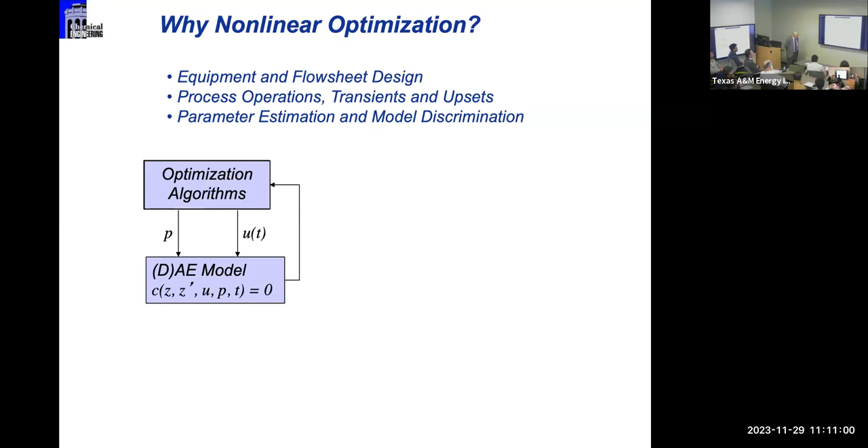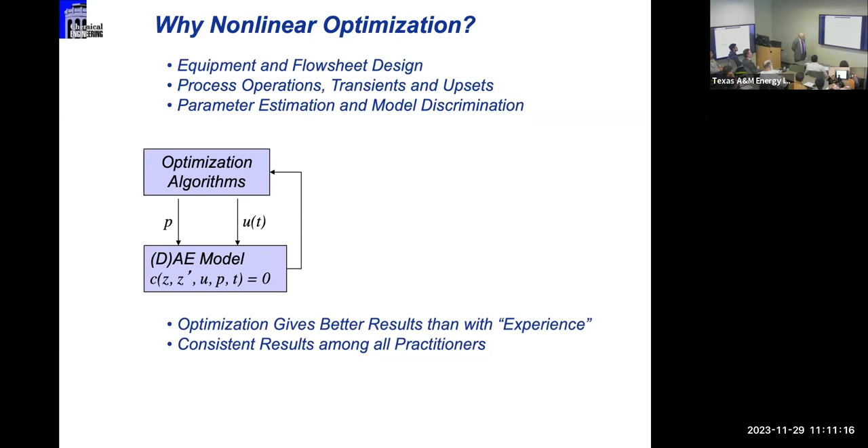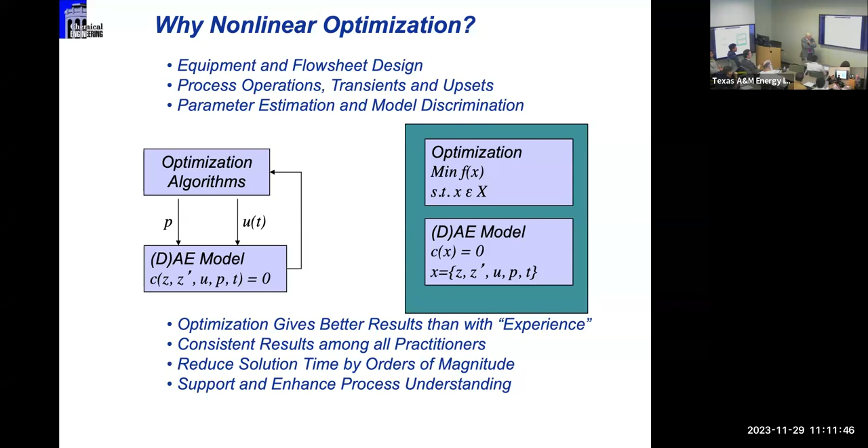We'll get into some caveats here, but I think that's essentially one of the things I wanted to focus on. Over the last 40 years, and Stratos has witnessed and participated in some of these things, you start off with this idea: don't search, solve for the optimality conditions directly. Now, these are local optimality conditions, not global ones.

Everyone wants the global solution, but you have to realize that if you want to do something quickly that scales to large-scale problems, you're probably willing to look at a local solution. And if you're really worried about whether you've overlooked anything, you can get many locals, you can solve for many local solutions. In fact, local methods are actually incorporated in many of the global optimization codes to accelerate them.

So what you do is say, okay, I want to solve those optimality conditions directly, using Newton-based methods to do that. Here are 4 generations of things that I've had the pleasure of working on. SQP is something that was developed in the late 70s, actually developed in the early 60s, and then had an interesting evolution to make it a classical, efficient method in the 70s.

In the 80s, it became part of standard flowsheet optimization techniques. It's still there. In the 90s, you wanted to expand this to do things like real-time optimization in refineries, so there was a variant of SQP that solves much larger problems, up to 10^5 to 10^6 variables, but only about 100 or so degrees of freedom. In this century, there was a breakthrough with interior point methods that breaks the complexity of many constraints with interior point functions, and also allows you to have many degrees of freedom, which allows you to do dynamic optimization.

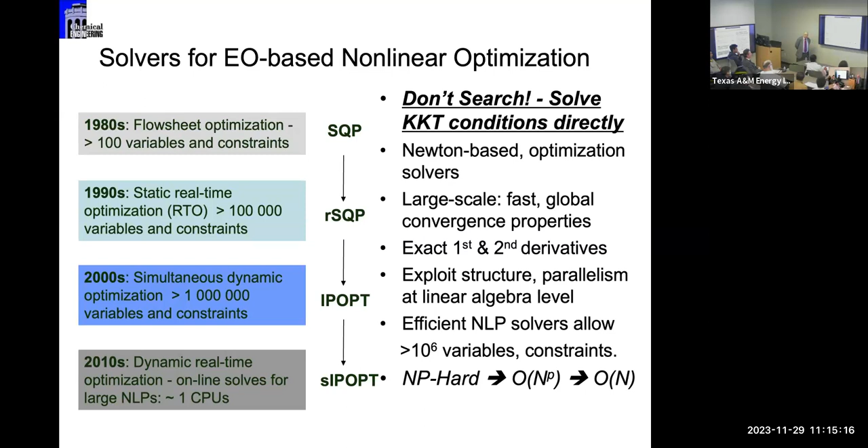So what do we do about this? Well, first of all, there are platforms that work well with these solvers. This one is called Pyomo - there are many others. It's a Python-based platform, Python Optimization Modeling Objects.

You have ways of formulating the type of problem that you have, ways of doing extensions to that problem, and ways of putting those objects together. Then you have a library of different solvers that you can pick and choose depending on the problem type. One of those is IPOPT, which is over there.

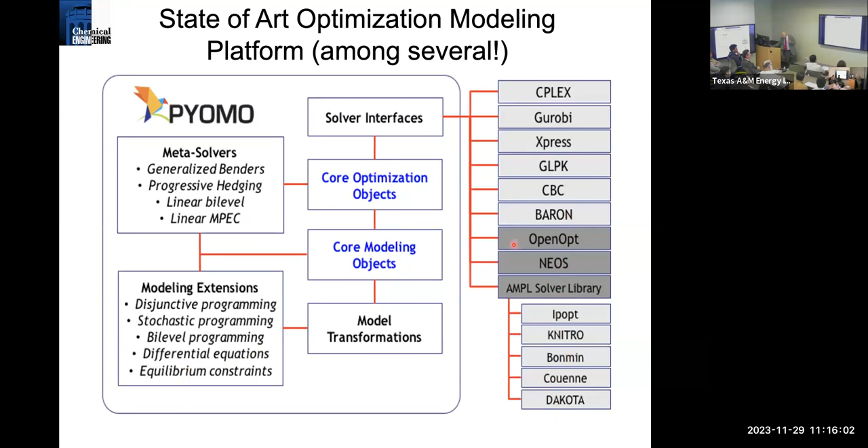Now what we're going to do is take that and ask, what are the challenges for computer-aided process engineering? In particular for energy systems, we're all very interested in decarbonization. We have to deal with processes with new feedstocks, energy sources, more efficient and sustainable and safe processes. Modeling is important, but also finding the best solution for that model is important for different objectives. And it's not one answer - it's a tool for you to explore the space with different and flexible objectives for the optimization problem.

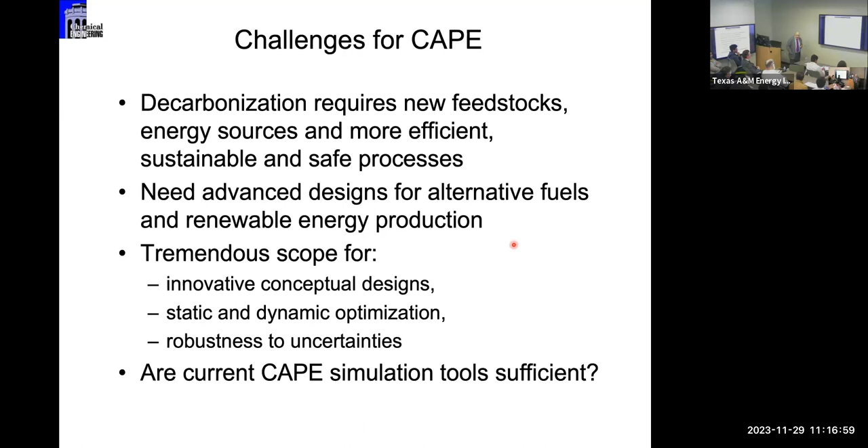So for example, finding advanced designs for alternate fuels - there's a tremendous scope for innovation on conceptual designs, static and dynamic optimization, robustness to uncertainties. Let's see if the tools we have right now are sufficient for that or can be improved.

I wanted to start with something that is maybe a challenge, but something that a lot of work has already been done on. I know Stratos and several people here have been working on advanced control systems, model predictive control. One of the questions I've asked myself is: I have a first principle dynamic model, how much of that can I actually put into an online algorithm? That's essentially what I want to do here.

So what we have is the process itself. We have a controller that is based on an optimization problem shown below. We want to update that model occasionally with data, and what we need to do is solve that model online in real time.

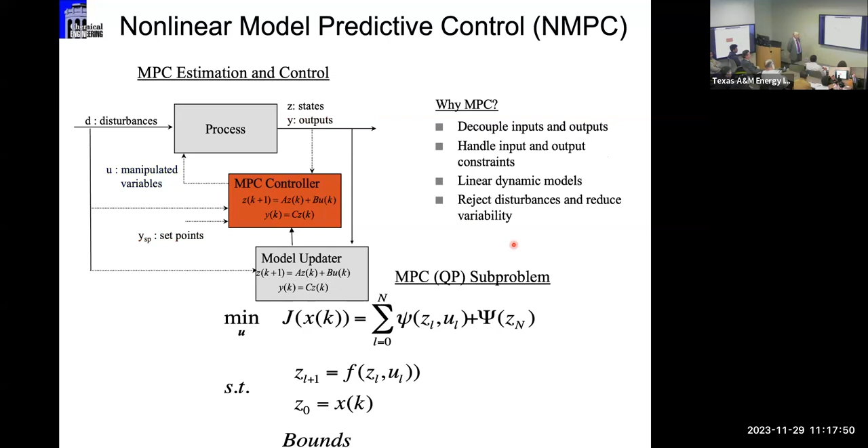If we take a look at that model, we're going to see this: the predictive horizon, long enough to allow us to be stable. Then you're going to say, okay, I need to find the outputs Y that are basically going to be driven to a set point, for example, or maybe optimize another objective. I need to find the inputs U that are actually going to be dealing with that. And I have some state space dynamic model over here, based on first principles maybe.

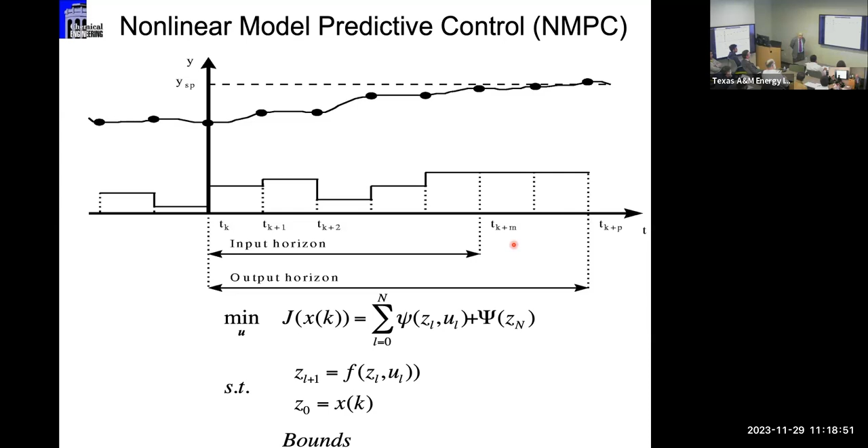That thing has to be solved within one sampling time. Once I solve that, I shift this horizon one step forward - first inject the control into the process, shift it one step forward, and do it again. If I don't do it fast enough, the process runs away from me, so it's no good. So the question is, this is a time-critical optimization problem - what kind of models can we use for that in order to make it work?

Well, over the years we've actually done quite a bit of work over the last 15, 16 years on these applications. And I wanted to show you a recent one that we worked on.

It's a really neat problem here, and I was very pleased to know that Stratos is working on a similar problem with hydrogen, with fuel cells. This is one that was actually put together at NETL. It's a reversible solid oxide fuel cell, very high temperature.

The idea is simply this: we want to use hydrogen as a fuel to ramp up electricity production, especially when renewables are offline. And when it's off-peak, we'd like to produce hydrogen when the electricity is cheap. So the fuel cell is going to be either a fuel cell or an electrolyzer, and we'd like to figure out ways to make this work fast and go back and forth.

In particular, how fast can these systems switch between operating modes? It's an interesting problem. It's certainly not a linear control problem. Just the fact that you're going to switch from one mode to another is important.

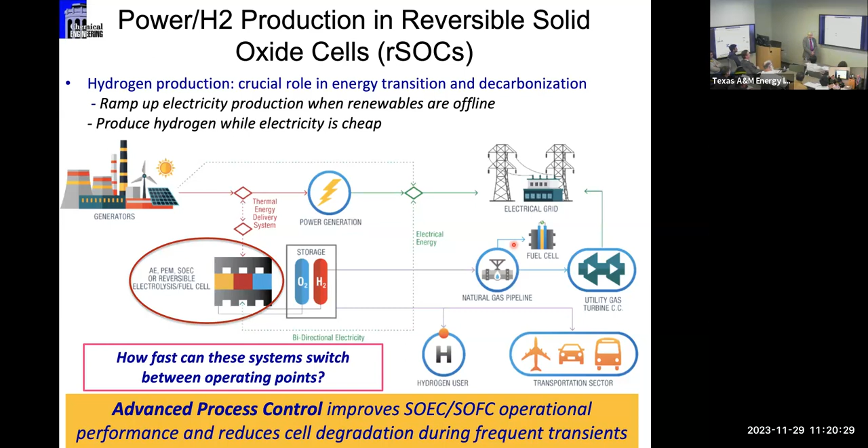Now, there are other things that are going to be important as well. It's high temperature, and it actually has some brittle materials involved for the solid oxide. We need to make sure that this has a long life, so the maintenance and operability of this is important.

So we're going to take a look at this, and this is the flow sheet. The heart of this, of course, is the solid oxide cell, which is in the red box there. Around it you have pumps, heat exchangers, certain feed flow rates of air, and hydrogen basically coming out of this, and then either electricity that's being supplied or generated as a fuel cell.

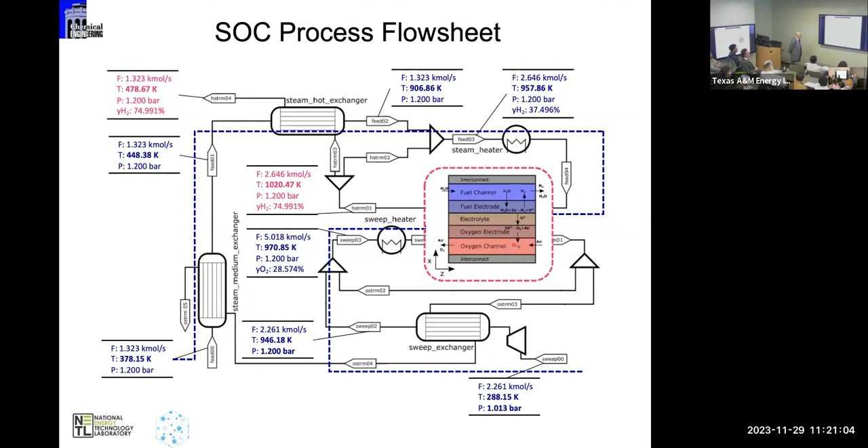And what we're going to see here is we have models for this that were developed within NETL. They're PDE-based dynamic models, first principles on the solid oxide cell. It's basically dealing with 1D fuel and oxygen channels on the outside of this cell, and then 2D PEN electrodes.

The key thing is basically this assembly in the middle: the fuel electrode, the electrolyte, the oxygen electrode. That's basically called the PEN. And that actually has some interesting characteristics because it needs to not degrade over this lifetime.

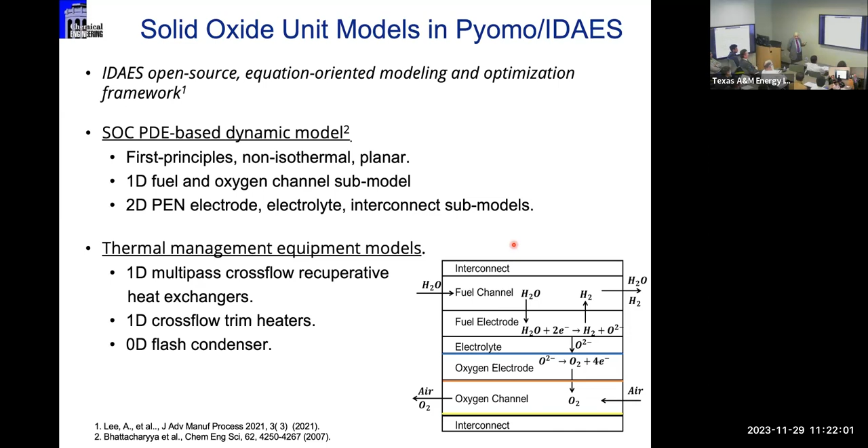In addition, the rest of the flow sheet is made of heat exchangers, trim heaters, condenser. Those are things that are modeled as well and actually participate in the control problem.

So in addition to that, we have a couple of constraints that have to be satisfied: basically preventing unintended electrolysis, keeping the cell potential in line, constraints on the trim heaters, constraints on the hydrogen formation, and concentration. And we're also interested in constraints dealing with what's going to happen with the inlet and outlet temperatures.

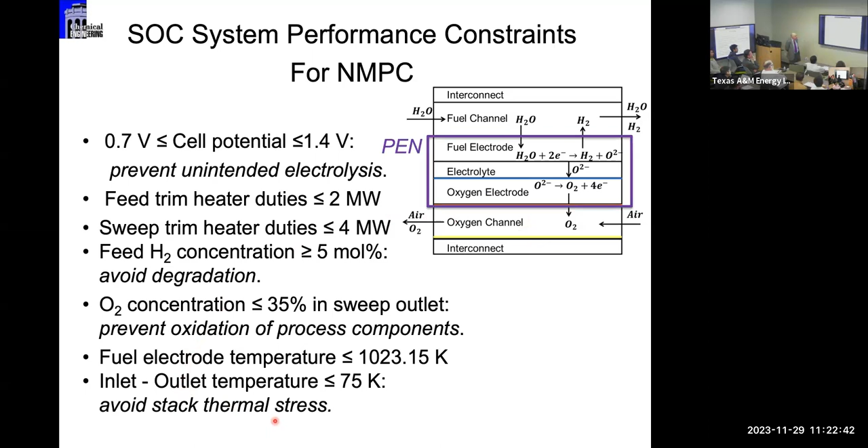And that's going to be to avoid thermal stresses. In addition, inside this positive electrolyte negative system, we have to deal with degradation. Those require additional constraints, which are these mixed spatial-temporal partial derivatives of temperature, and they have to be there in order to prevent thermal degradation.

So this is part of the optimization problem. Of course, we also have that objective function, which is going to be tracking a trajectory on whether we generate power or hydrogen, some stabilizing constraints on the manipulated variables, MVs, and our controlled variables are basically tracking this. And then finally, we have other rate of change constraints, and finally this curvature penalty, which is going to be important to deal with.

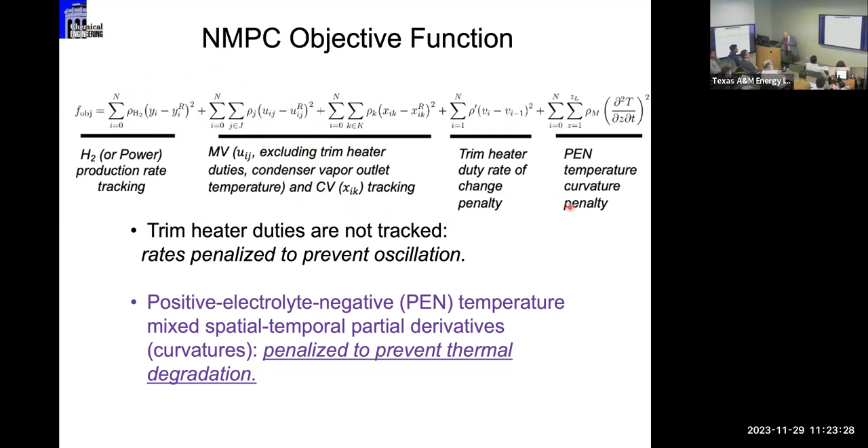So we decided to make this an interesting study. There are several manipulated variables and controlled variables that are part of this system, and you can see them from different parts of the flow sheet. You also see the fact that this could be done with PID controllers. In fact, most people in process engineering think that PID is the answer and will always be the answer.

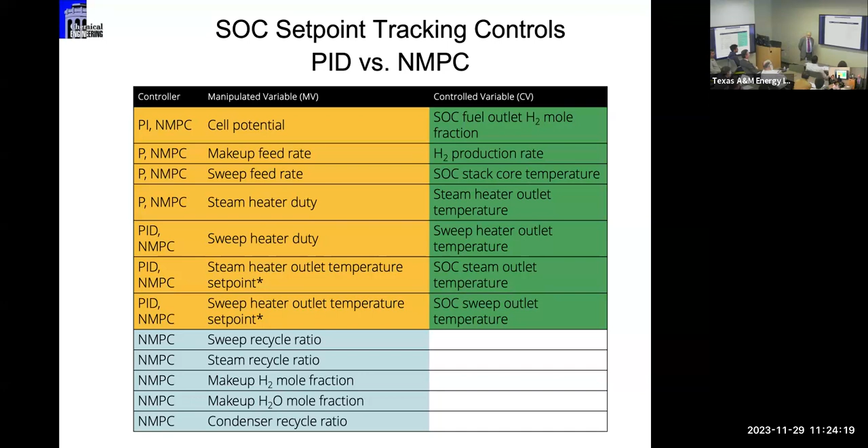One of our colleagues, an excellent person with a PhD from Jim Rawlings, put together a PID system, cascade system, that was essentially our straw man for dealing with that. In addition, we took the same inputs and outputs, MVs and CVs, and did nonlinear model predictive control. So the question is, which one's better? Which one can work?

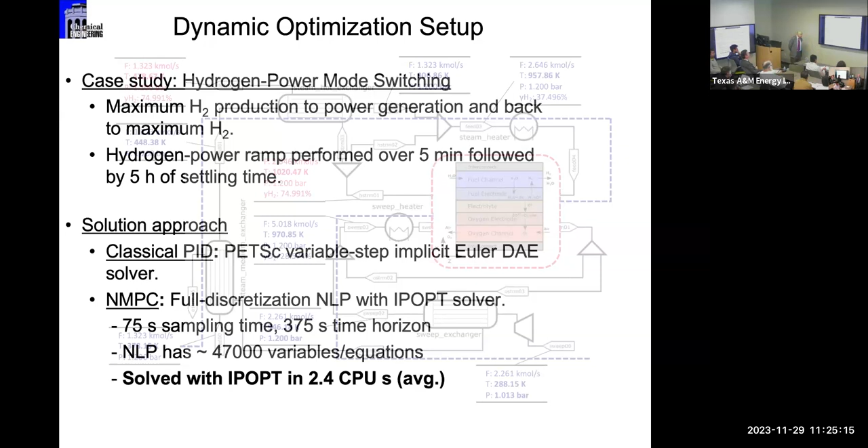So that's actually not bad, certainly fast enough for implementing this in real time. Now if you take a look at the results, the first thing we see is that we do mode switching.

So what we're doing is we start off with the first period, and that's basically going to give us hydrogen generation. Then we switch, and over here we use power - this is a negative number here - and we generate hydrogen. Then we consume hydrogen here. Take that back - here we use hydrogen to generate. So we go back and forth: when we're using power, we're generating hydrogen, and when we're making power, we're consuming hydrogen.

Now if you take a look, PI and NMPC are pretty much the same, except these orange blips tell you that PI has some spikes and not such nice properties, but it's not even worth noticing. You also notice the difference in the duties for the trim heaters is a little different, but not too bad. The solid lines are the NMPC, the dashed dotted lines are the PI. Again, not too much difference.

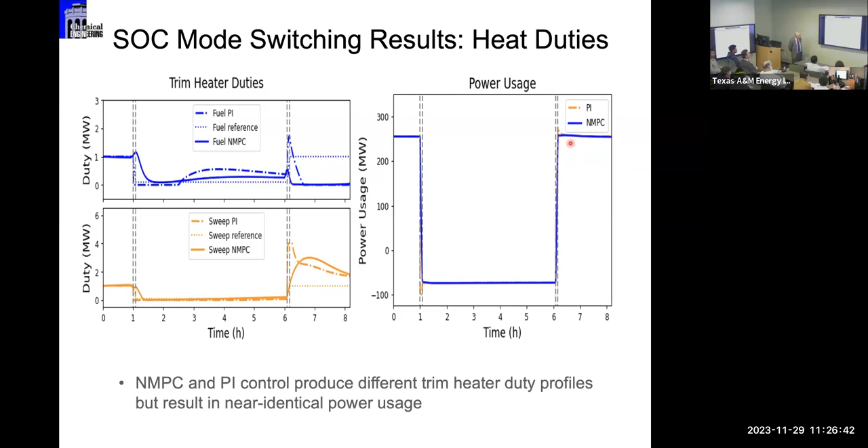Here's something interesting. You notice that the temperature settling times are a little longer for NMPC, and you're wondering why. Then you see - oh, we have constraints with NMPC that prevent degradation of that PEN. What happened as a result of that? Of course, PI control doesn't have those constraints, doesn't know how to deal with them. But what's the difference in that?

Then you see that here - these are the violations of those constraints. If you use NMPC, things are pretty smooth. Again, the solid lines are here, and if you take a look at the PID, which are the dashed lines, they're a little different. You see these spiky things, especially on the bottom graphic - those spikes are all due to PID. If you look a little closer, those spikes persist throughout the entire length of the electrolyte system. Those are things completely avoided when you do this with NMPC.

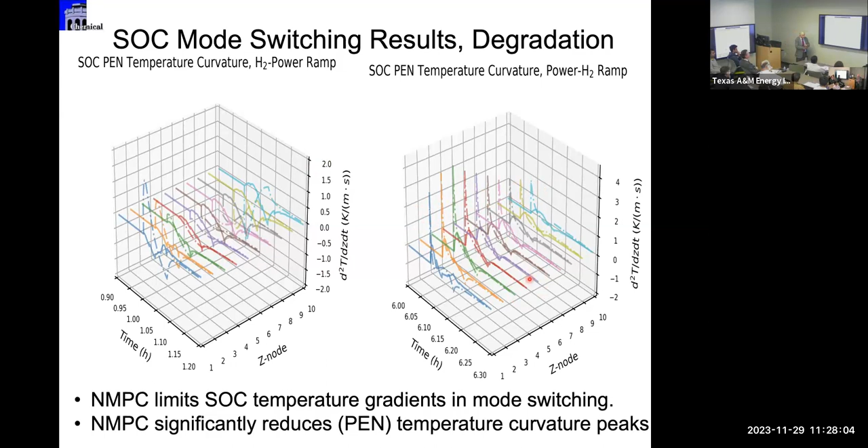So this is one reason to put that first principle model in there and allow yourself to solve an optimization problem with the relevant constraints. So this is the first case study. Let's go to the next one.

This was one I thought was a lot of fun because it was motivated by an industrial project. What I was very happy about was not only did the company support this work, but they sent a person to do his PhD as part of this work. And that was great.

When he came, we took a look and saw - here's a benzene chlorination process. What's nice about this process is that you have lots of byproducts. These are the ones: dichlorobenzene, different isomers of dichlorobenzene, trichlorobenzene, chlorobenzene.

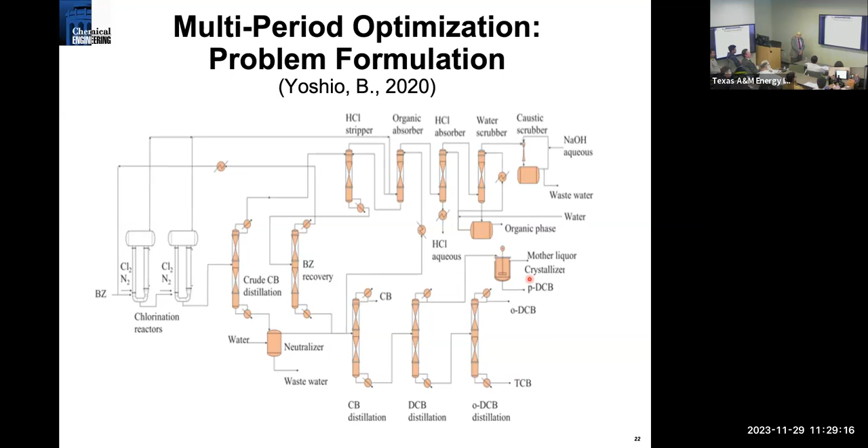All of those have different prices that vary in time. Based on the market, demand uncertainty, and demand supply, this optimization allows you to run the plant over periods that take advantage of the market. You have customers with certain demands and prices that have to be satisfied. You want to do this as a multi-period optimization problem. Let's take a look at that.

What we've got here is a problem that looks like this. For each period you have variables, Zi, that represent the states and decisions. Then you have these variables, D, which are complicating variables that persist over the entire time. One example you can write as complicating variables is inventory—things you make in a certain period that hang around for a while. In each period you also have the entire flow sheet model. That's basically what you want to put together.

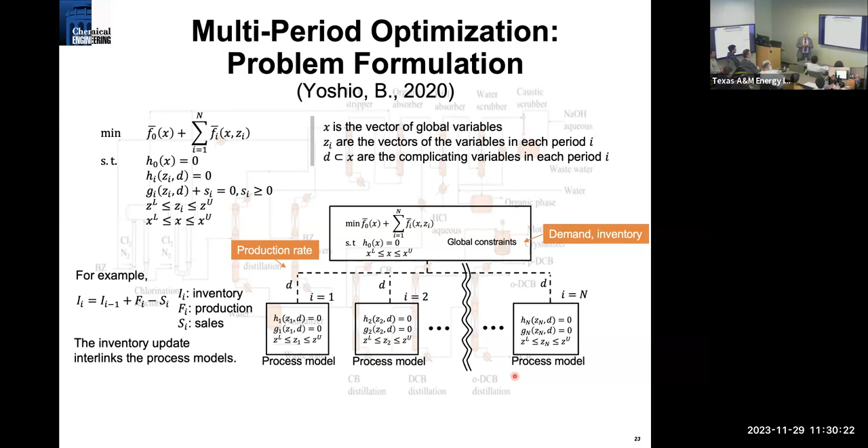So how do we solve this problem? The number of periods depends on how long you want to plan. If you want to do this for a year, that's 12 periods monthly, or 52 periods weekly—it's going to grow. The question is, what do you do with an optimization problem that has to cover all of that, because the complicating variables D apply to all the periods?

Let's take a look at this. You do a decomposition. One is internal decomposition, and the person who championed that with nonlinear optimization is Carl Laird, who's here, and he's now a professor at Carnegie Mellon as well. He developed methods that deal with the linear algebra level of this problem, so you can take it apart. That works extremely well and it parallelizes. One minor drawback is that it's monolithic—you have to do this within one system, and it's hard to exploit anything outside of that system.

The other approach, external decomposition, has been championed by several people in the community, and my colleague Ignacio Grossmann is a big proponent of external decompositions. What they do is basically things like Benders decomposition or Lagrangian relaxation. That works very well externally with different solvers at different levels, but what happens is you don't get the fast convergence of Newton's method.

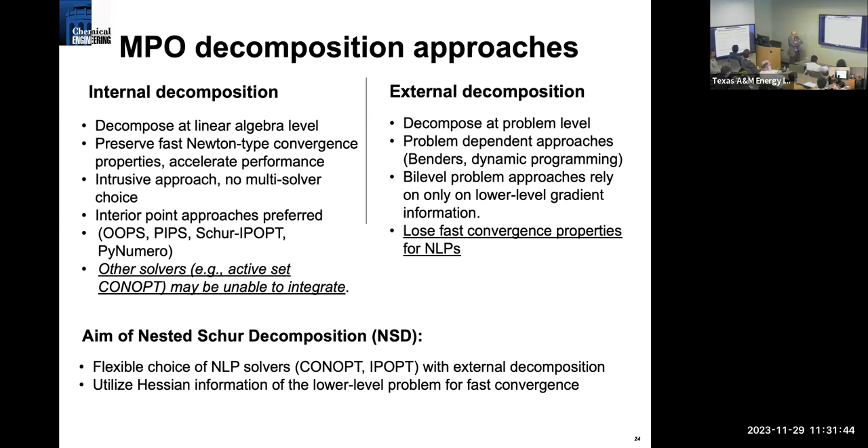So we have something in between, called nested Schur decomposition. This allows you to get the best of both worlds. What we did was start off and look at the problem this way: divide it up into a higher level problem for the complicating variables, which we now call X, and a lower level problem with a bunch of individual period variables, and they fit together in a nice way.

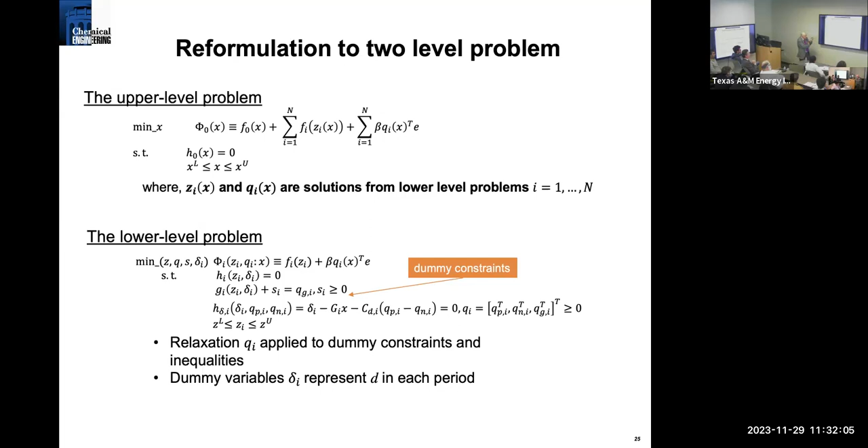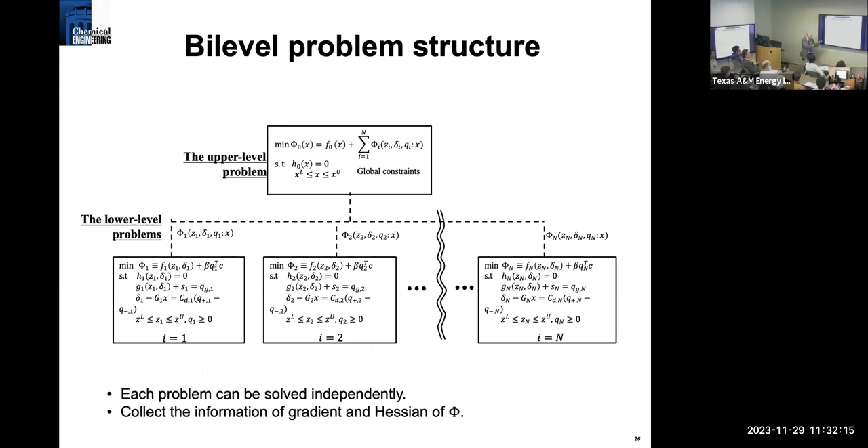If you look at it this way, what we would like to do is solve each of these lower level problems independently and pass that information to a coordinating upper level problem. Now, what does that look like? I'll do a little bit of a cartoon here.

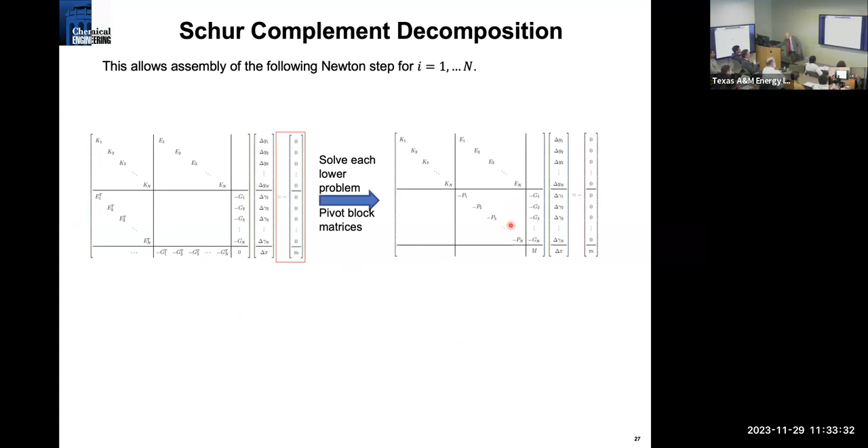Now if you do nested Schur, all we're going to do is take that right-hand side and solve each individual problem, so almost all of it goes to zero except for the bottom part. What difference does that make? You're solving each individual problem by itself, and that's why the right-hand side is zero. Then we can zero out and pivot through this to make sure everything is upper triangular, so we end up with this guy m here and this capital M here.

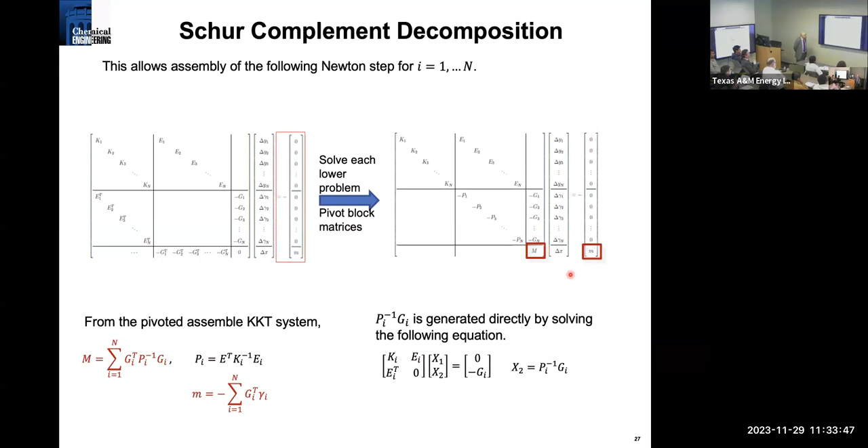So these two guys are actually very easy to calculate, and that's all you need for the upper level problem. When you go back and put that into the upper level problem, very little information has to be transferred. You solve the other problems independently in parallel, and that allows you to coordinate these things and do that fairly quickly. It's a lot easier to solve than if you have to handle the whole monolith yourself.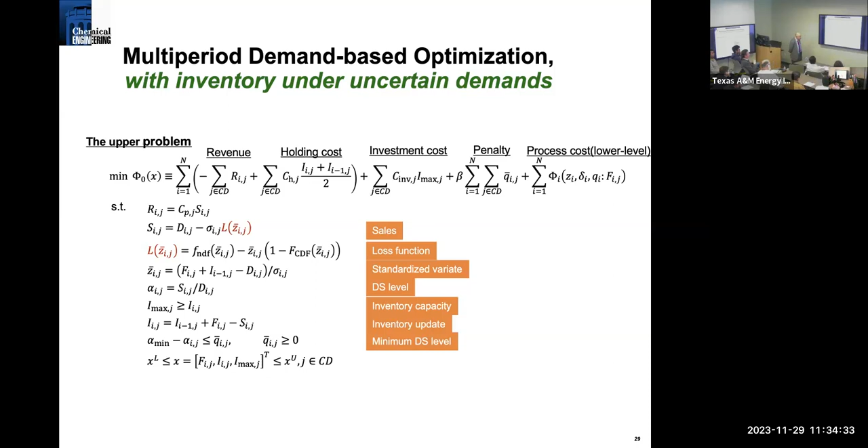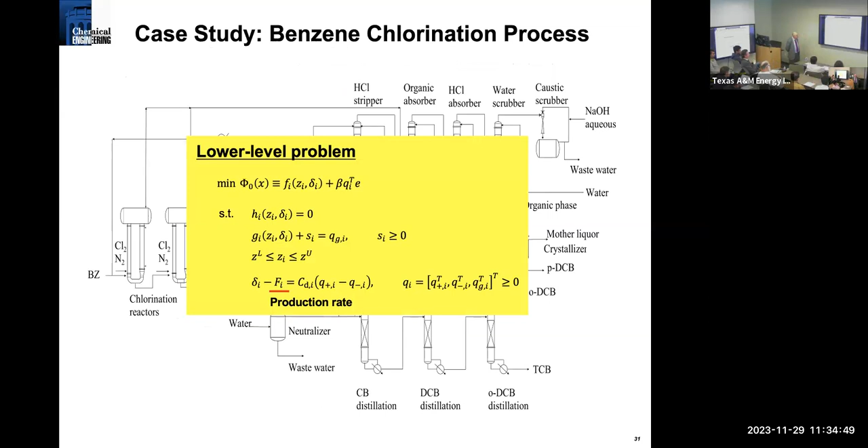The demand satisfaction level, inventories, etc., that are coordinated. The lower level problem is this entire flow sheet, each one of these being done over and over and over again for each period. And you see some of the dummy variables, the Q's here and the F's, those are basically carried over from the upper level problem.

So this is nice. What you see is as you add more and more periods, this is a log scale, you're seeing this climb. So now you're getting close to 100,000 variables with just 14 periods. We didn't go that much farther. The person that worked on this had to return to his company, but eventually what happened to us, this was a demand curve of 3 of those products that was being made, and the prices changed as well.

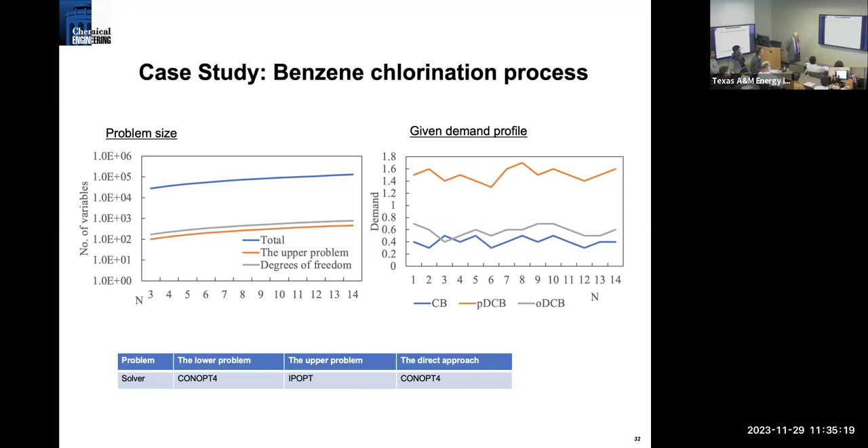And so when that thing had to solve, we had to solve this with the decomposition. So the objective value of the direct approach, in other words, if you solve it as a monolith or by the decomposition, you get exactly the same answer, exactly tracking this line.

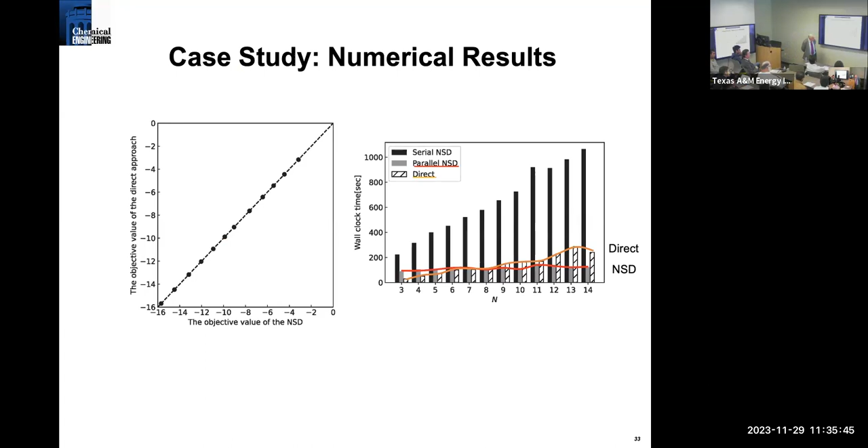And what you see here is basically how the parallelism works. What happens is the direct approach for small problems is still faster. But what you see is as the number of periods increases, you end up basically getting more and more benefit.

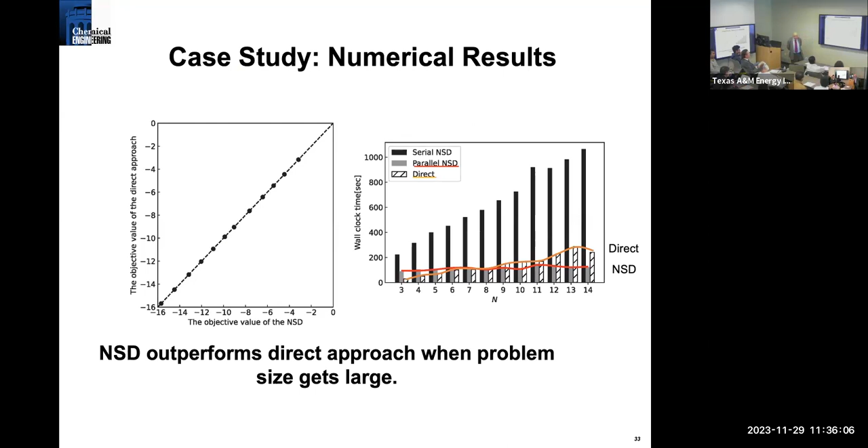Now, you're always going to have more periods. If you want to do this over a year, weekly, you're going to have 52 periods, which we're not even close to yet. And that's basically the reason to do this. Okay, so this gives you some idea of what you can do with large-scale decomposition.

So now let me take it to the next level. Everyone will say, well, what about first principle models? Do we really need them? We all know that there's a big gorilla in the room that is basically saying, no, the answer is machine learning. Basically build a neural net. You can then basically take enough data and model everything, optimize everything. And I'm not being facetious here. I mean, we all rely on those tools.

And we're basically also faced with this idea of large language models. And one of the big differences that we're seeing here is machine learning is especially effective and especially pervasive when there is no truth model. Basically, if you want to write an essay, or you want to translate from one language to another, or you want to do image recognition, there's no truth there. There's basically no alternative but to use machine learning. So that's the one difference I wanted to note here.

But we do have truth models. We have first principle models. And the question is, what makes them difficult or challenging is the fact that when they get complicated, they're not going to be that easy to optimize. So what do we do? Well, most of the time we replace them with a surrogate model, machine learning or otherwise.

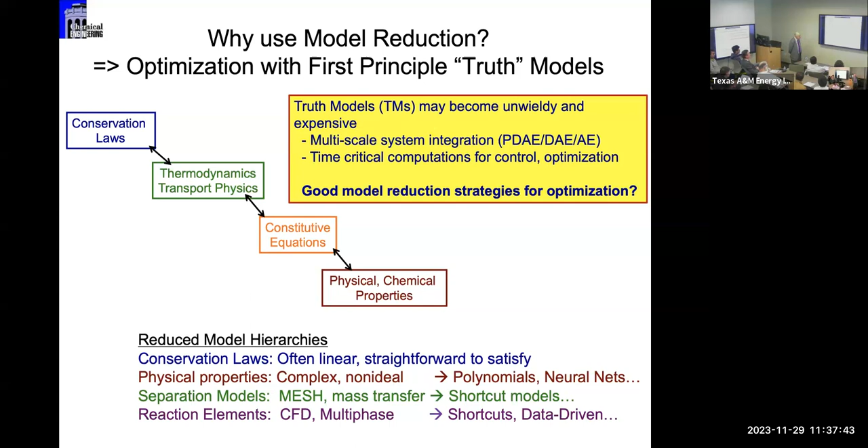And here's some examples of that. And if you wanted to go to a systematic approach, what you could say is, okay, let's use the data to get an experimental design to construct the model. Let's select the kind of model that we want, especially among the machine learning models in red. And then what we have to do is fit that model with a bunch of things, especially things like stochastic gradient descent, which is very popular. So we've got all of these possibilities here that will replace the truth model.

And the question is, if I optimize that replacement, what's going to happen? Is this actually going to give us something that makes sense? Well, most people say, sure, if I have enough data and I can fit this model very well, then why don't I just use that model instead of the truth model, especially if it's easier to run, easier to solve? Well, are we going to preserve the physics? Well, the surrogate model doesn't know the physics, but if it has enough data, maybe.

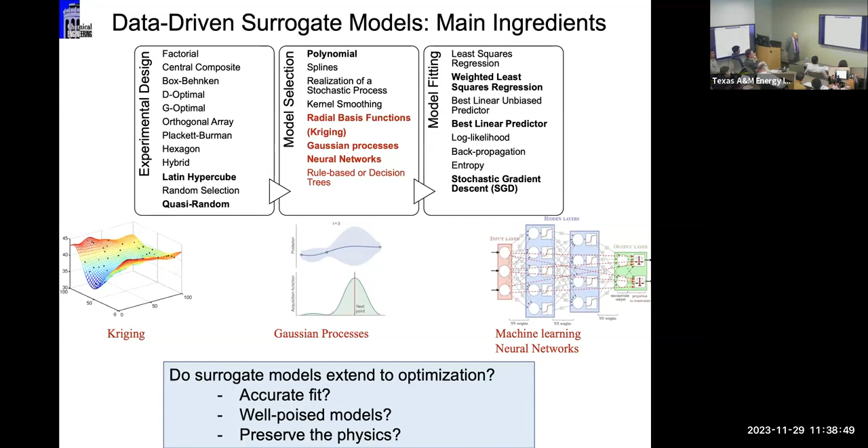So let's take a look. This was something that Dowling, who's now a professor at University of Notre Dame, experienced when he was a graduate student in my group. He said, okay, I want to build a surrogate model of the steam tables. And we have some very good thermodynamic models of those. And one of the things you know from ideal solution theory, from ideal vapor-liquid equilibrium, is that the ideal enthalpy is a function of temperature, not of pressure. So you end up with this relationship here.

And it is actually, in most real systems, the enthalpy does go up with pressure. But if you try to fit that data, that's going to be a fairly small slope, and the sign may be a little bit off.

And if the sign is wrong, then what you end up with is a different kind of decision from the optimizer, because optimizers are very good at finding your errors, and they will cheat to give you the best solution. In this case, what Alex discovered was that when he fitted this, he found an accurate surrogate model to the steam tables that said make sure you design the largest compressors you can, because they actually generate work. And that's because of this little flaw in the enthalpy.

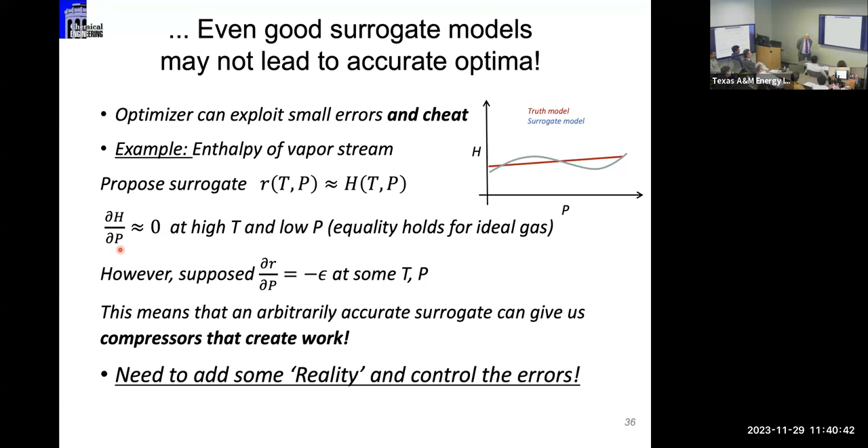So this is one of the things you have to look for. Even good surrogate models may not lead to accurate optima. So what do we do to control that? Can you still use them because they solve things faster?

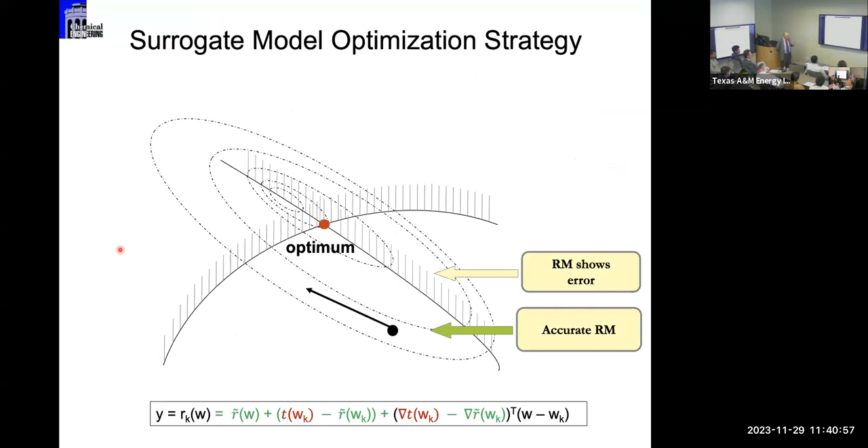So this is the idea. What we're going to do is we're going to start off with an accurate reduced model, a surrogate model. And then what we're going to do is solve an optimization problem, but we're going to put some guardrails around it, called the trust region.

And the trust region basically says, how well am I actually improving the model, the truth model, when I take that step? So in this case I'll keep that step inside the trust region, do some trust region management to see if it extrapolates well enough, and then take another step. I keep doing that until hopefully I converge to something that is the optimum for the truth model.

And I'm going to show you a little bit going on here. So this is my surrogate model, this guy. Now my surrogate model here is R tilde, which I can choose my favorite preference.

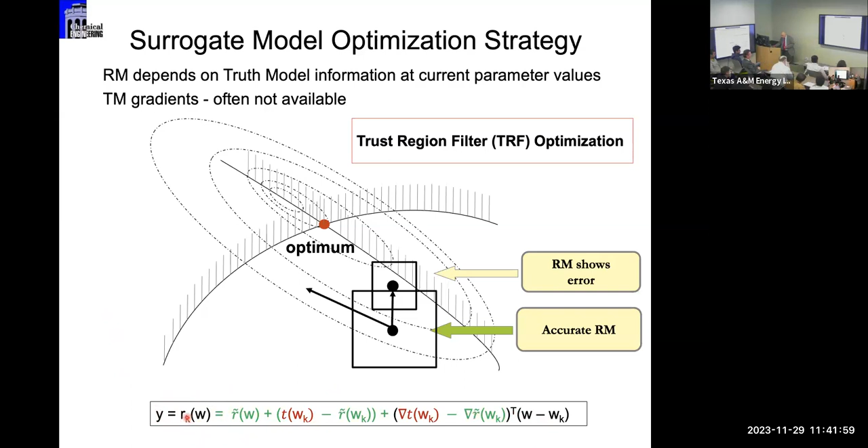But it's going to actually have two things: one is called a zero order correction and a first order correction. W are the inputs, Y are the outputs. And notice this subscript K, which means that I have corrections at each iteration I'm going to use.

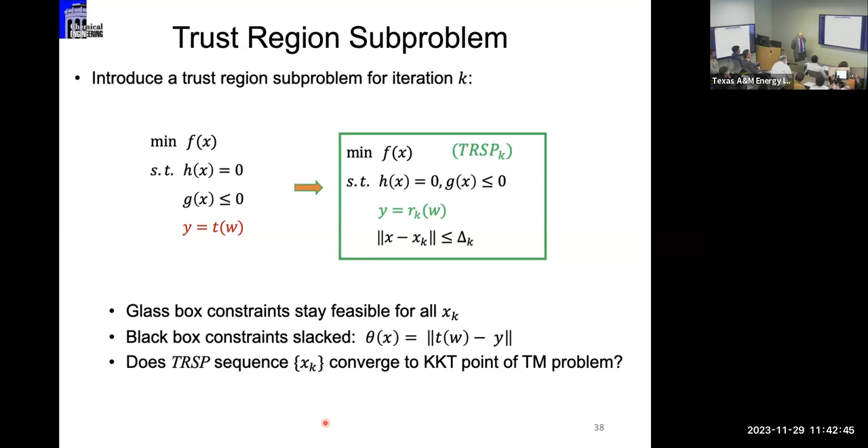Let's leave the guardrail in there and talk about what delta K is actually going to be. So this is the algorithm. The algorithm is provably convergent to the solution of the truth model problem. Now what you need is zero order corrections and first order corrections there.

You build yourself a surrogate model, which is basically over here, which we call a kappa fully linear model. And then what you do is you check whether you're converged, you solve your trust region problem, you check whether you're improving the objective function or just getting more feasible. You decrease the trust region if it's the latter, or if it's not improving. And then what you do is you go back and check this again.

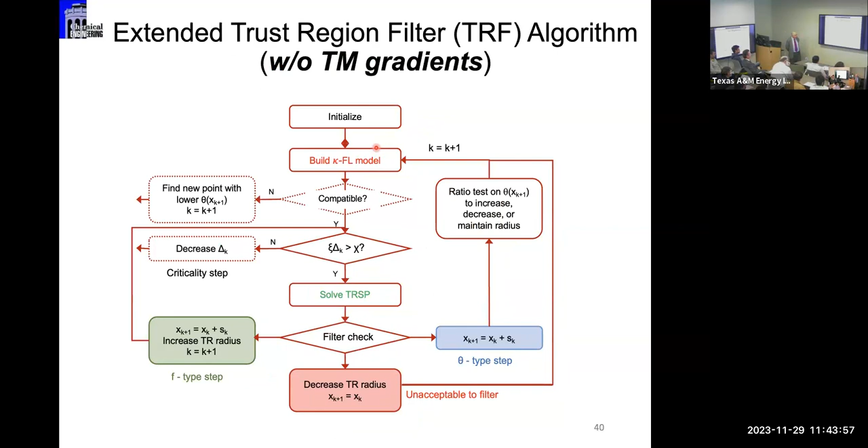Now, this requires gradients from the truth model - that's the first order correction. We can extend this if you don't have gradients from the truth model. It's a little more complicated, a bit more work, but it still has the same convergence proof, so that's still good. And what we're going to do here is I'd like to show you some examples.

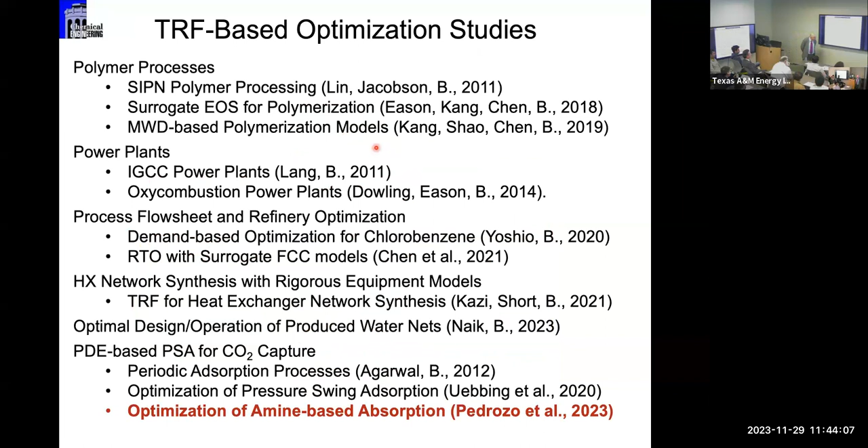So this is basically a carbon capture example. What we have here is an amine-based absorber. This is some recent work that was done by Alejandro Pedrozo.

What we're doing here is taking flue gas—this was actually for an oil company that was interested in taking its point sources from the refinery and basically trying to do some carbon capture with it. They were very interested in amine-based CO2 capture absorption, and they wanted to figure out what's the best absorbent, liquid absorbent to use.

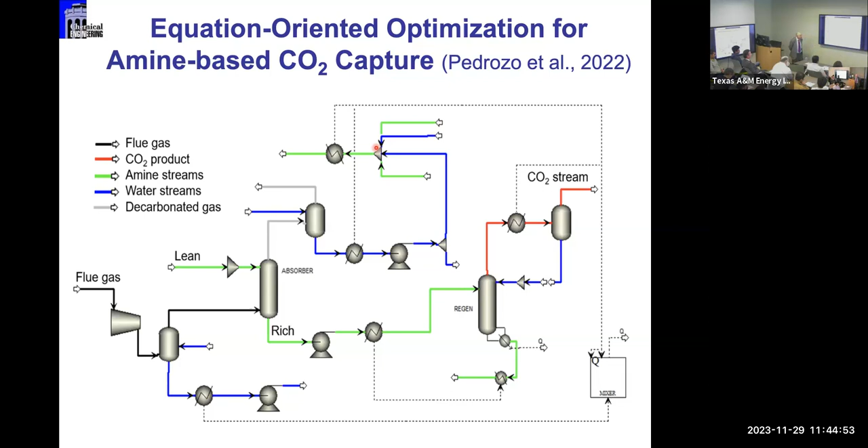So in this case, what we found out was we said, let's take a look at that. We took a look at several solvents: MEA, 2-MPZ, and then AFS with PZ, Piperazine.

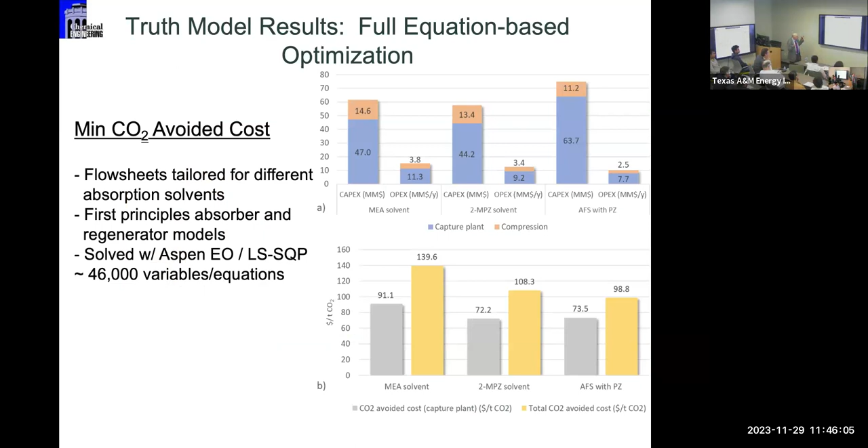So this is the size of the problem, and this is basically our truth model result that was solved using this. Now we wanted to say, okay, take that absorber model, which is by far the largest model in the flow sheet, and let's replace it with a surrogate model.

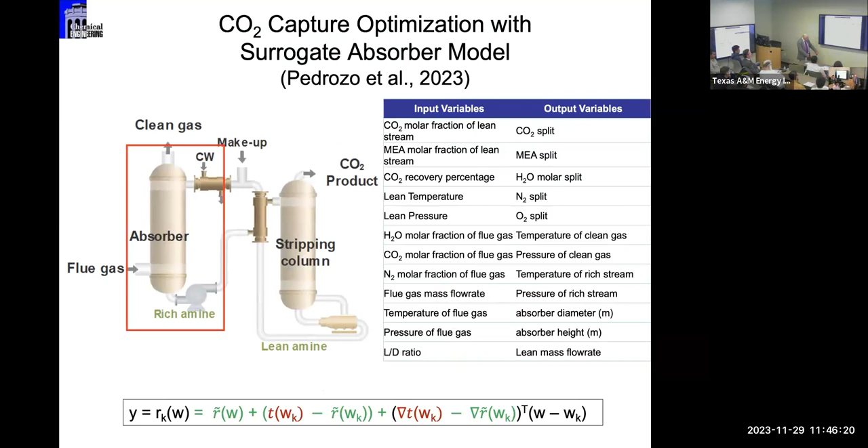If I do that, I'll use this idea here: R tilde is what we change. My model has 46,000 variables, and without the absorber, it goes down to like 4,300 to 4,400 variables. So I'm going to build a surrogate that basically takes care of the rest of those 40,000-odd variables.

So in this case, what we did was we chose—I don't know if you can see this very well, let's see if I can—okay, what we did here was we said R tilde is equal to 0. In other words, no surrogate model, just first and zero order corrections.

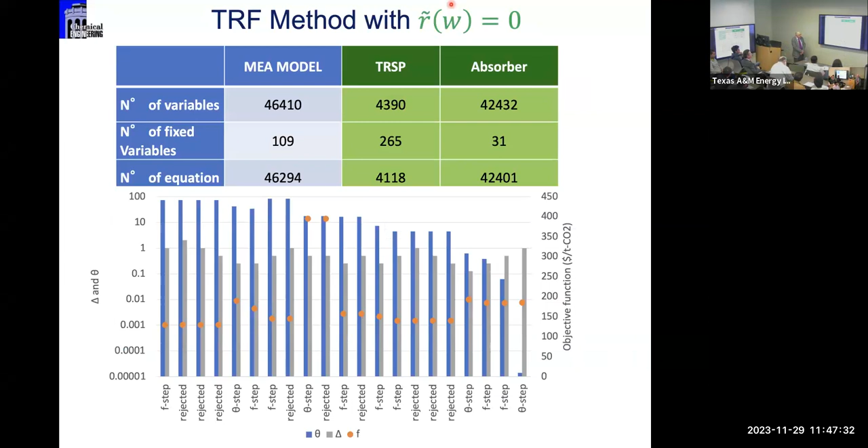Now that's not very good, and this is not competitive even with the truth optimization. So we started by generating a surrogate model using Alamo. Alamo is a very interesting mixed integer approach that generates surrogate models—basically linear combinations of basis functions that it chooses.

It was developed by Nick Sahinidis, and it's a very powerful way of coming up with surrogate models. So that's what we did, and we have lots of inputs that are inputs to the surrogate. So it took a while to generate this, and we had 1% error as a result of this.

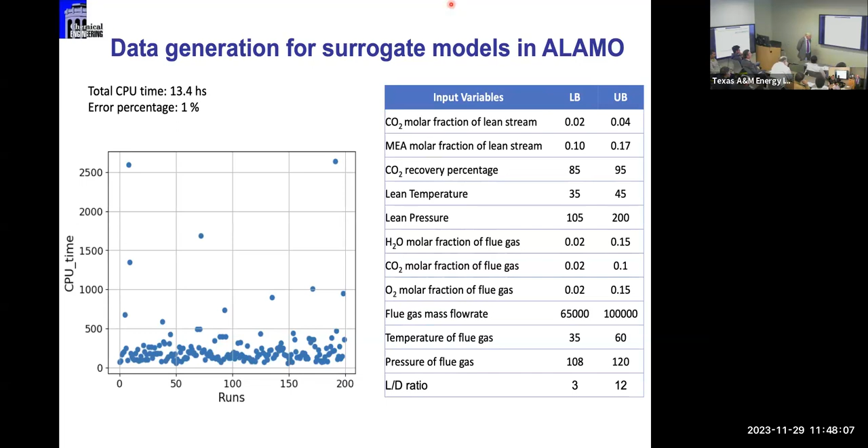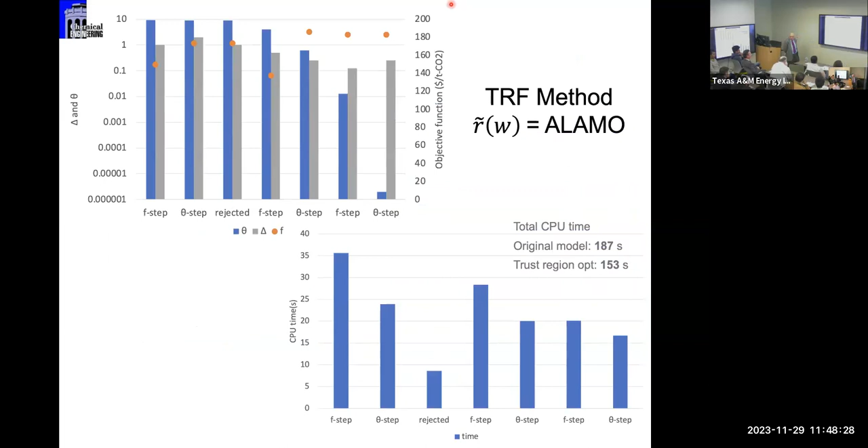And that was going to be our surrogate model, so that's R tilde over there—it's Alamo. And now it converges to the same truth solution, but only in 7 iterations, slightly faster than it was for the truth model. So we thought this is great, this is a good sign, because now we're starting to be competitive, as the surrogate model is not that big.

And then finally, what we did was say, wait a second, in Aspen you've got lots of shortcut models. They're not the rigorous models that we needed for the amine-based CO2 capture, but we said, okay, let's use that shortcut model. So we're simply going to take that and use the shortcut model as our R tilde, and that's going to be solved in 5 iterations.

Okay, now it's a little bit faster. So you can see this is the scope that we need. Now you're going to say, well, why do this at all? Because I just have to take one of those iterations, and that's my solution. But that's not going to guarantee that you're at the truth optimum.

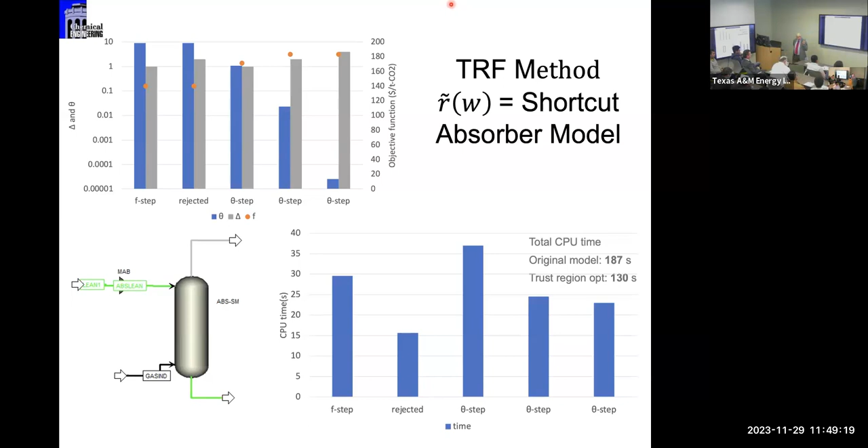Now I wanted to show you the last example, which is this guy. Take that flow sheet again and say, let's take that absorber and replace it with a membrane separator, so there's a liquid flowing in the membrane. And so you have this guy over here that has to be taken care of and designed. This is actually complicated enough that you need a CFD model for it.

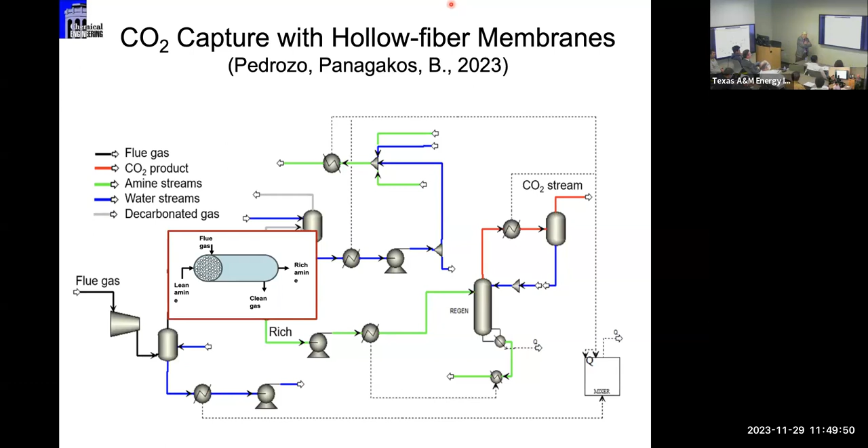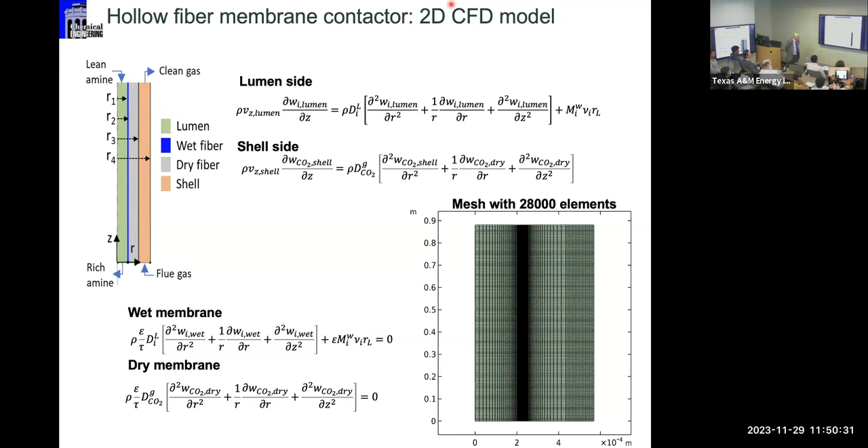So let's solve this thing. And when we do that, what you're going to see is the following thing. This was done where you had COMSOL Multiphysics doing the CFD, you had Aspen Plus doing the optimization, you had Python doing the trust region filter method, and we put that all together.

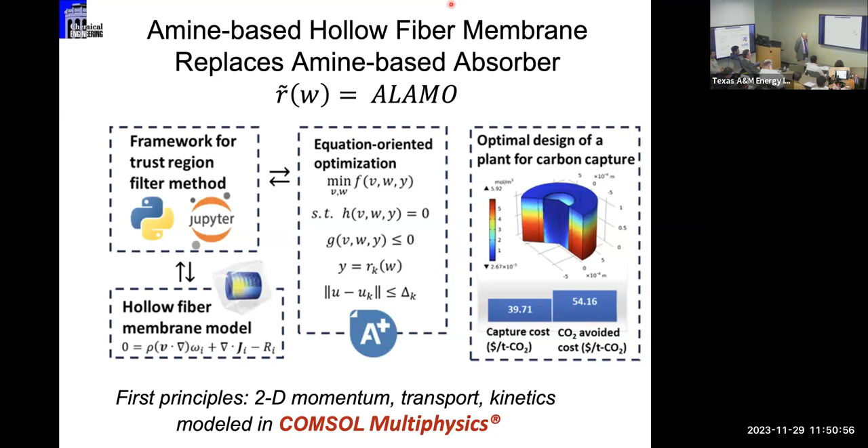And what's going to happen when you solve this basically is the same kind of thing. The reduced model here was Alamo. We didn't have a shortcut, so that's what we used. Now let's take a look.

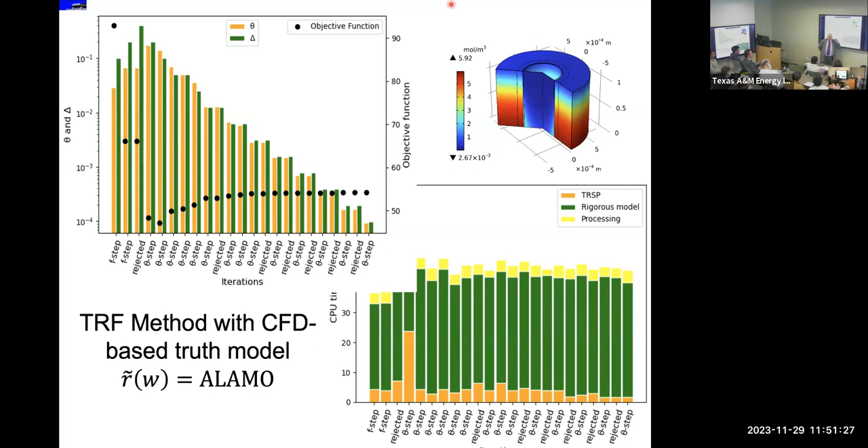This is an intractable problem, but when you put it together with trust region filter, this is what you get. You get it to converge, and you can show that this actually converges to something that satisfies the optimality conditions. What you see is the progress of the trust region filter method here converging to this tolerance, on a log scale. And then what you see also is the dominant cost here, unfortunately, is to solve the CFD model, but it converges after 23 iterations.

Now, what's interesting about this is that it shows some potential. You look at the avoided cost for CO2 capture, this is without the compression. This is $54 instead of the $73 -- again, don't hold me to the numbers because they're based on literature data, but it's promising and worth exploring even more.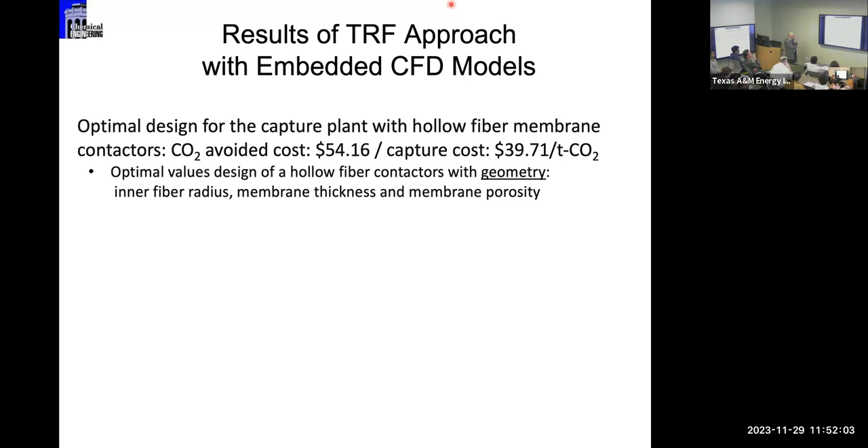But what we're doing is we're optimizing the geometry of the hollow fiber membrane contactors, and we could basically do that with CFD. Now what you end up with is you have a trust region filter method formulating this. This was solved with Aspen codes, but we're doing this with Pyomo as well. And this takes about 20 minutes, which is not too bad.

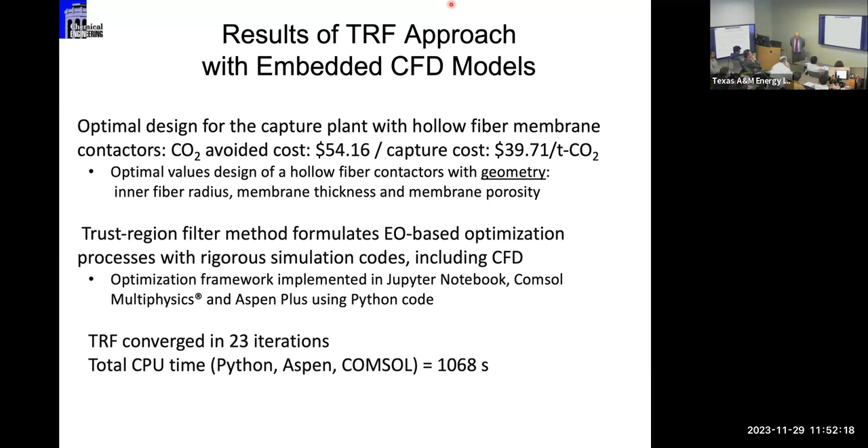All right, so a couple of things to say. Let me just conclude with a couple of things. First, we're going to say fast equation-oriented optimization is reality. And the key mantra is: don't search when you do optimization, solve. Solve the optimality conditions, do it simultaneously with the simulation model.

We have fast Newton-based solvers that can do that. We have modeling platforms that allow you to have structured large-scale models. And we can deal with optimization extensions to dynamic systems and those that are uncertain. What we saw was real-time dynamic optimization with first principles models. We can maintain stability, exploiting uncertainties. And we can do that even with fast sensitivity calculations to minimize the online cost.

We talked about decomposition for structured NLPs, especially this multi-period problem. That was a demand-side optimization. And so that allows us to exploit large-scale structures in parallel using the same Newton-type steps, and basically the same concepts to solve the NLP. And you can select multiple solvers for the smaller, lower level problems.

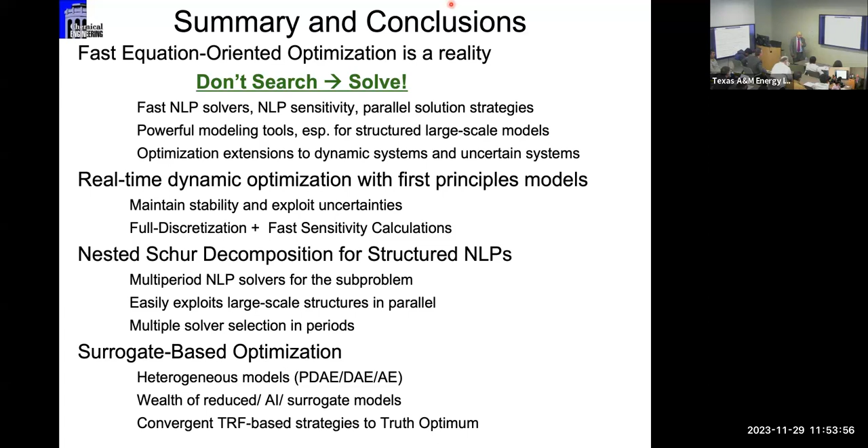And finally, we talked about surrogate-based optimization. We can have different kinds of models, and we can replace them with AI or surrogate models. And we have a trust region filter algorithm to take us to the truth optimum. So that's essentially the story here. And what I wanted to say is that there's a huge potential to solve some challenging applications with this new bag of tools. Thank you very much.